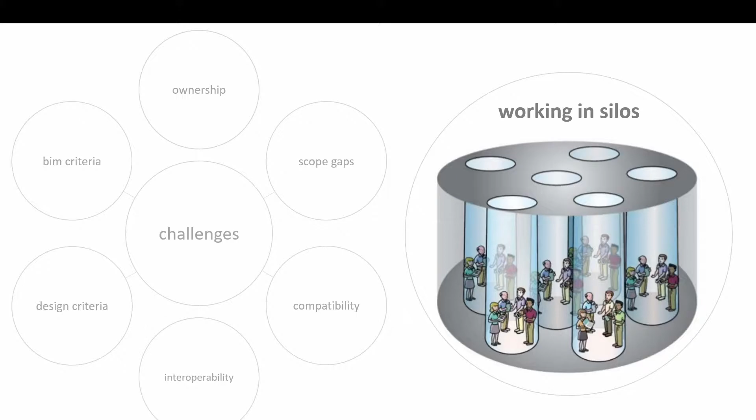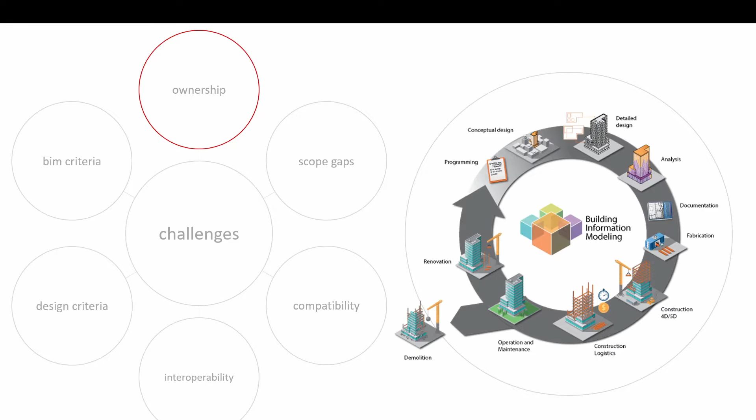When it comes to ownership, apart from the client, no single stakeholder owns everything, including BIM. For example, who owns the BIM model? At which stage does BIM start? Which BIM software to use. How often is the same BIM platform used from feasibility to construction and operation stages?

The analogy is like having a single vehicle that can be used as a sports car, a sedan, an SUV, off-roader, a shipment truck, an excavator. Oh, and by the way, there's also autonomous and electric. Maybe one day, but we're not there yet, and neither is BIM.

Lack of clarity in terms of ownership creates scope identification challenges, especially at the interfaces between different scopes owned by different stakeholders. Standard BIM may assist in resolving geometric coordination challenges. However, functional and operational coordination remains a major challenge.

As different stakeholders think differently and use different tools to produce information in different formats, which create major data compatibility challenges. The larger and more complex the project, the more difficult it becomes to formulate a mental model or the bigger picture of the entire project in the minds of project stakeholders, a point that I will elaborate on later in the presentation.

As different stakeholders operate differently, it creates many interoperability challenges, which is not just limited to software and file formats, but it also extends to how they strategize and process information, which has a direct impact on how they build and communicate their BIM models.

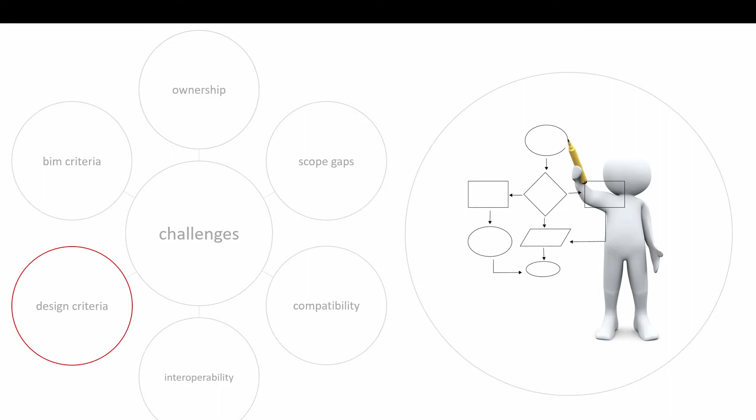The built environment industry is well established to a certain degree in terms of communicating the what and the end product, like the building geometry, material specs, and anything related to the project that is quantitatively measurable by nature. The industry, however, is far behind other industries in terms of capturing and communicating the why and the how, i.e. the design and construction and operation rationale, which may be qualitative and not as easily measured.

The compartmentalized nature of how we think and operate in the built environment is clearly reflected in how we construct and coordinate our BIM models, which often mirrors the challenges explained earlier. Standard BIM models, for example, do not capture and communicate well the design rationale and its qualitative factors and drivers. Furthermore, as BIM models grow larger in complexity and size, they become too heavy and too confusing, like a maze, for standard users to manage and navigate through.

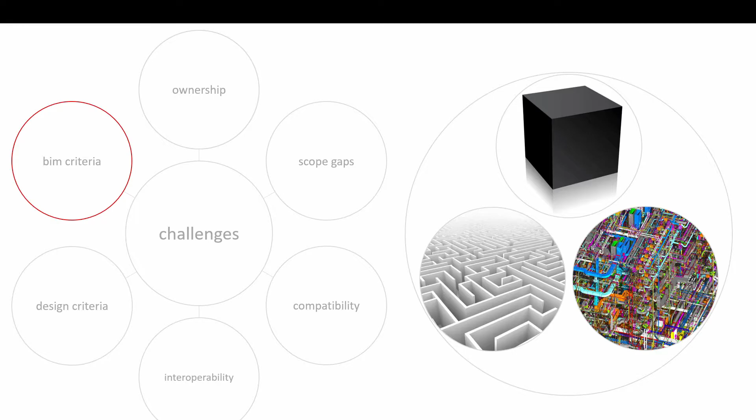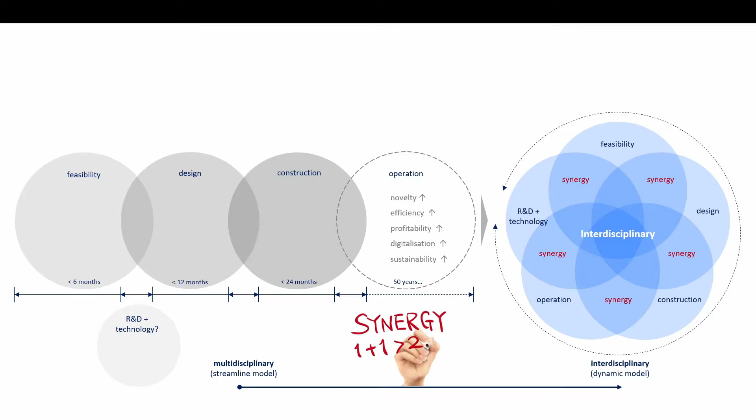A BIM model is therefore always at risk of becoming a black box that is only accessible to a few specialized operators with advanced technical skills and hardware. Therefore, a more dynamic, iterative, interdisciplinary model, as opposed to a standard multidisciplinary one, is suggested as a first step to respond to this paradigm shift, where specialists from various disciplines and backgrounds are brought together under the umbrella of one team, from early feasibility stages and maintained all the way through to construction and operation, so that the project knowledge and design rationale is neither lost nor distorted.

The first case study that I'm going to present is the Al Bahar Towers. In 2007, the Abu Dhabi Investment Council wanted their new headquarters to become a global landmark, inspired by the Abu Dhabi Vision 2030 that aspires for a state-of-the-art sustainable solution.

The site sits opposite to trees and mangrove fields, facing north. We explored traditional local and regional architecture and how nature survives harsh weather conditions to inspire our concept, including beehives, cacti, and pineapples, where the latter is the nickname given to the towers by the locals. Regional heritage offers amazing lessons in terms of form and orientation, structure, courtyards, materiality, shading, and finally geometric composition, which is deeply rooted into the culture of the region, as we are about to explore.

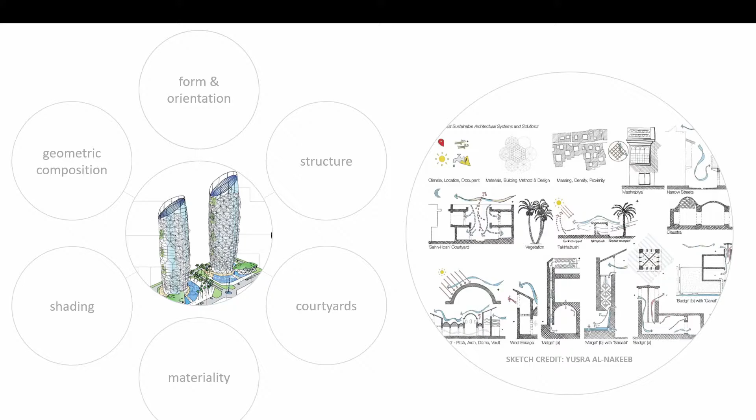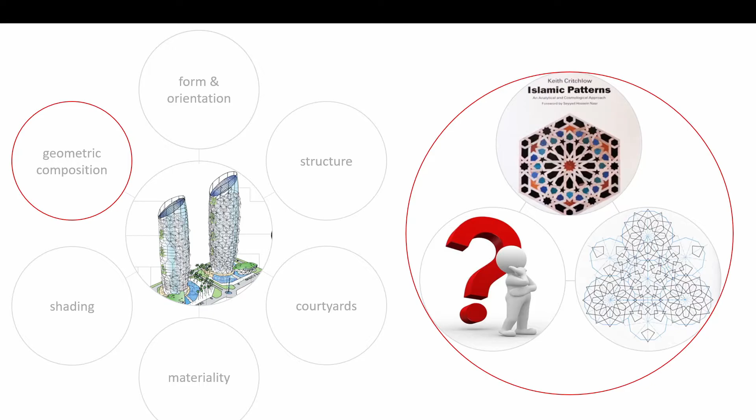Former managing director at Aedas, Peter Oborn, gave me a book which illustrates nicely how complex geometric patterns are constructed, primarily through intersecting circles and spheres. But what was the rationale that went behind them? In a nutshell, it is an implicit expression of unity with nature and the cosmos, using an abstract language that is universal, well-measured, and timeless. Mathematics and geometry fit that criteria very well.

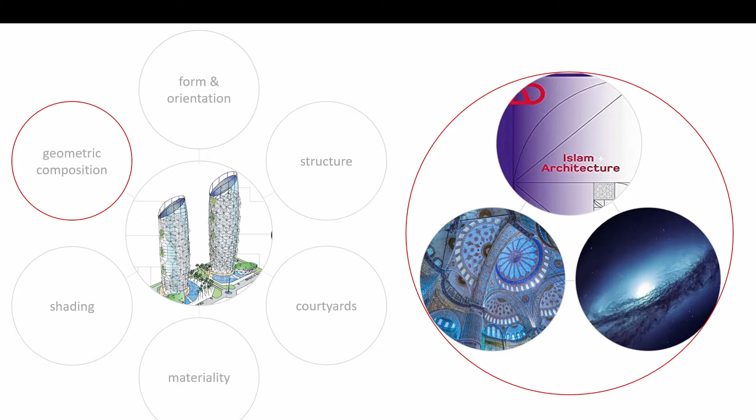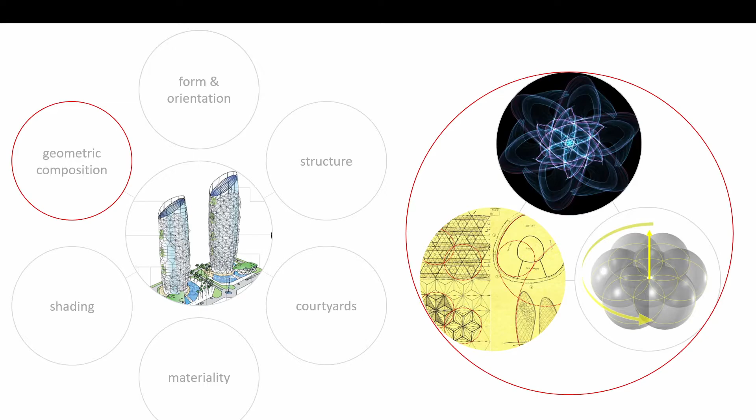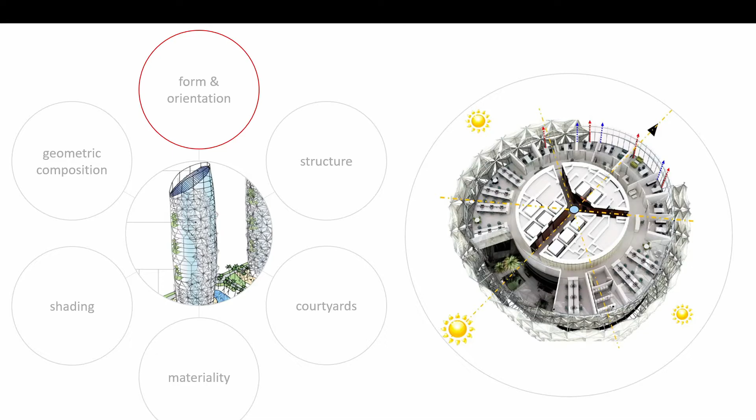Circles and spheres were considered as the finite elements through which the smallest patterns to the largest building structures were constructed. We use the same principles to design an integrated solution. A cocoon-like form maximizes volume and minimizes surface area, which reduces energy exchange between the internal cooler environment and the external hotter one. The prominent spaces were oriented north as they receive less direct sunlight while also enjoying better views.

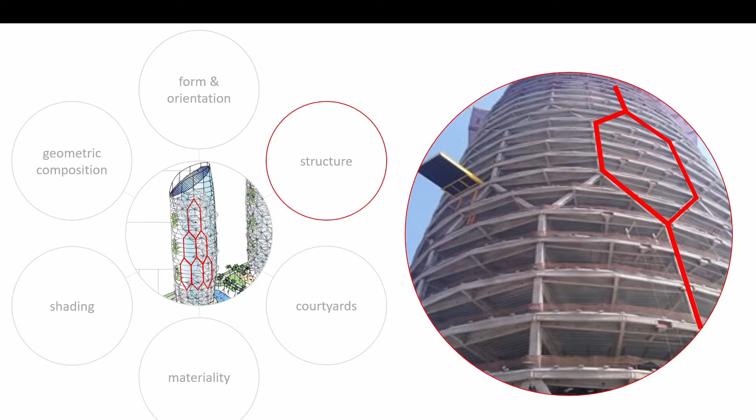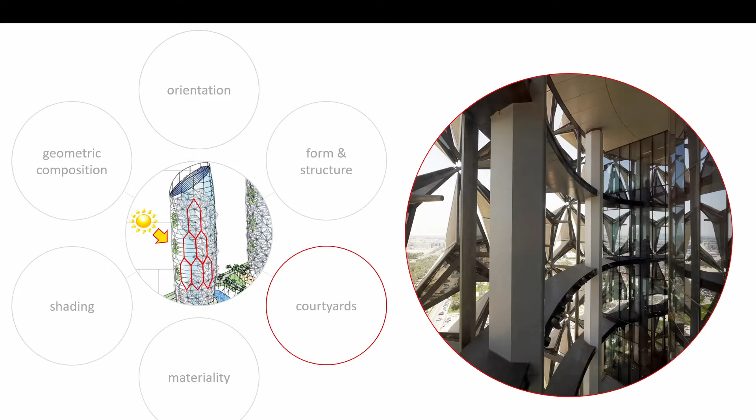Abu Dhabi is in a seismic zone, albeit not as critical as Tokyo or Los Angeles. A fully braced system would be overkill, while a common diagrid system would be inefficient. A stretched honeycomb structure offered a better balance between vertical and diagonal bracing members, the first of its kind used on tower structures. This enabled us to integrate sky gardens on the south side of the building, reducing solar gain while providing amenity spaces for occupants to enjoy fresh air.

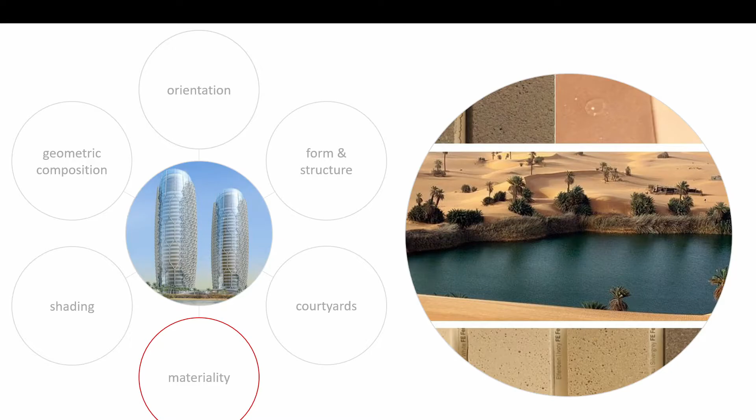The client wanted a high-tech building, but we needed to make sure that we have a solution that embraces the environment as opposed to defying it. A fine beige texture, for example, camouflages well dust and sand particles in the region over there.

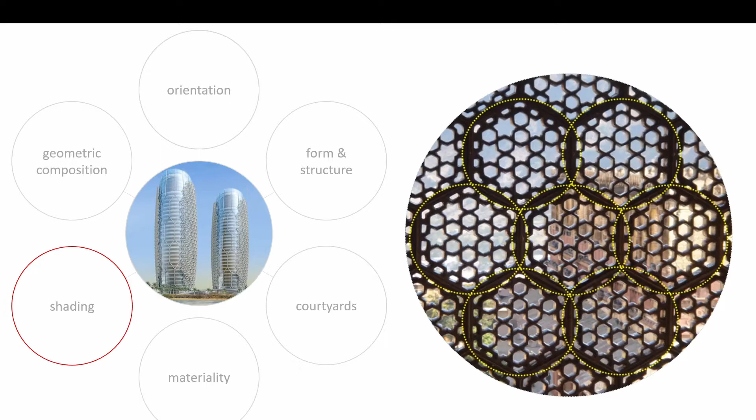Now the elephant in the room, the shading screen. It was inspired by the Mashrabiyah, a traditional lattice screen popular in the region. The dense pattern shades the building very effectively, irrespective of orientation, while still allowing visibility and ventilation. The only downside to such screens is that they are fixed, which obstructs the view and admission of lighting when shading against direct sunlight is not required.

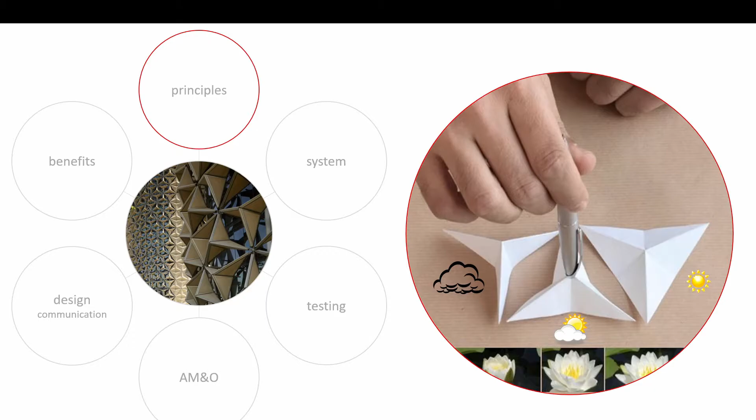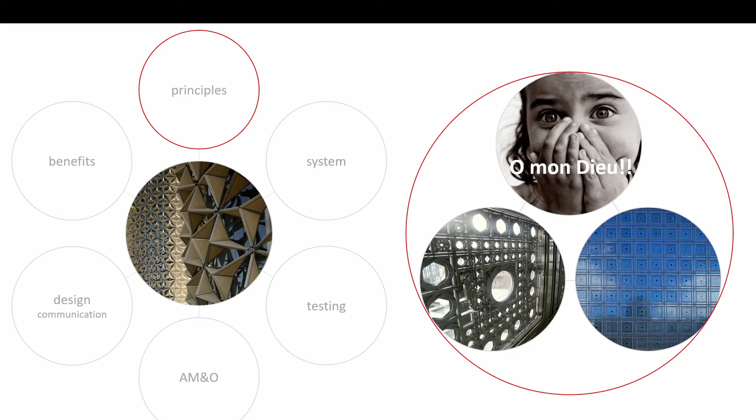We therefore infused the fourth dimension by developing an origami-like umbrella system that folds and unfolds with the movement of the sun. Yes, of course, we knew that the Institut du Monde Arabe gave up on making their dynamic facade work, but we thought that we may have an opportunity to take this beautiful concept to the next level.

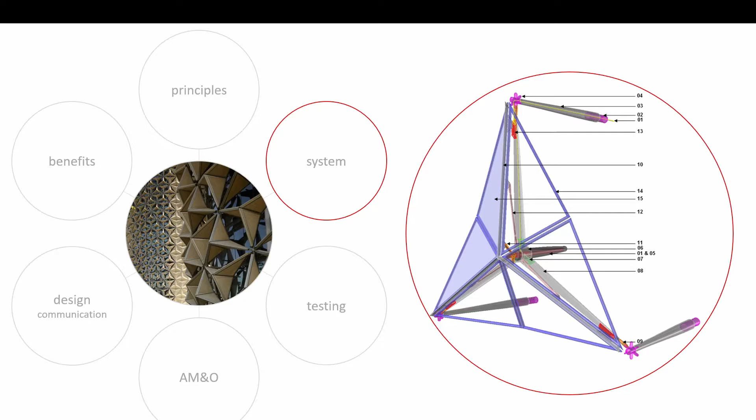The system was designed as a triangular unitized unit activated by a central screwjack actuator. The screen comprises a fiberglass mesh supported by aluminium frames and a duplex stainless steel structure. We conducted a durability test to test the mechanism over the course of 30,000 cycles, which is equivalent to 75 years in operation.

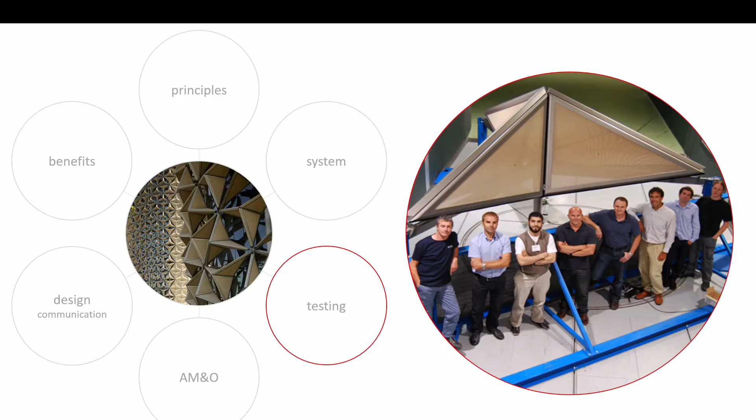Another wind tunnel test was conducted at 240 kilometers per hour wind speed to test its structural integrity. It passed both. Lightweight maintenance is done through abseiling, while heavy-duty maintenance is done through BMU units located at the top of the towers.

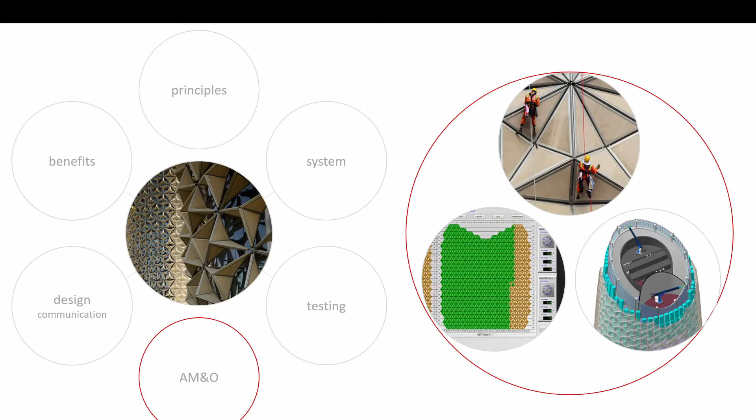The system is controlled by installed software informed by wind, water, and light sensors, especially to deal with unusual conditions. As no standards cover such design, a 400-page Lego-like manual was developed to visually communicate the algorithmic principles of the building, enabling recreation of the design using any software. More than 13 software packages were used in total.

I shall elaborate on the design communication later in the presentation, where BIM was critical to the process.

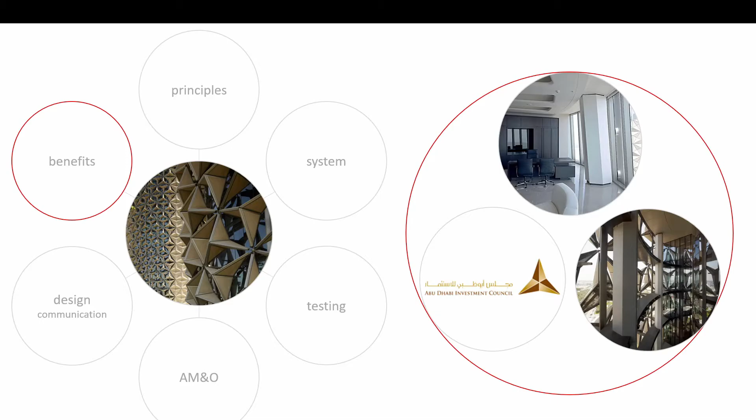The Mashrabiyah helps in cooling the building and in optimizing admission of natural light, while still providing views to the outside. It offers a unique experience and a great source of entertainment for occupants and visitors alike.

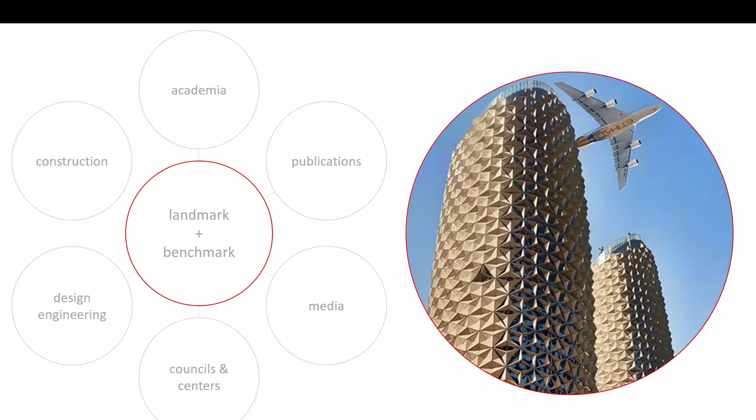The building is continuously used as a case study and referenced by various stakeholders across the built environment. What you're about to see was completely unplanned for, and it even took me by surprise when it happened.

The government is using the building to celebrate their National Day every year.

The Al Bahar Towers won the Best Innovation Award for 2012, offered by the Council on Tall Buildings and Urban Habitat in Chicago, and has recently been listed among the 50 most influential towers over the past 50 years by the same body. It has become both a landmark and a benchmark for context-considerate, interdisciplinary design for generations to come.

So that was a brief introduction to the project, but as promised earlier, it is important to elaborate on the design communication aspect, where BIM played a critical role.

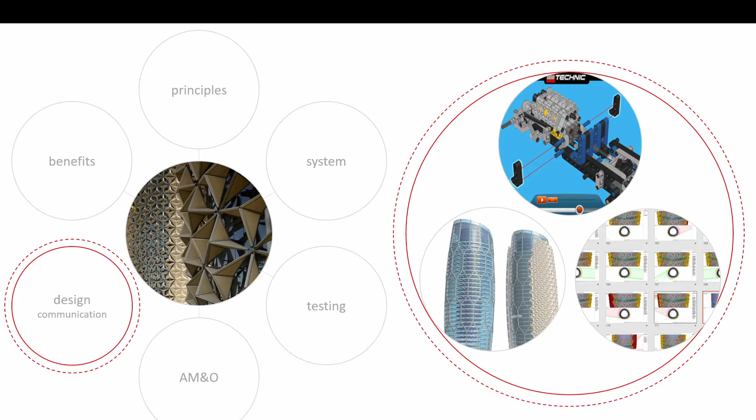As the lead designer on the project, it became obvious early on that it would be nearly impossible to limit the process to a single BIM software, for the following reasons.

The design complexity of the project is not limited to the building geometry, but it also extends to cover the building performance, especially the dynamic mechanism and adaptive behavior of the Mashrabiyah screen.

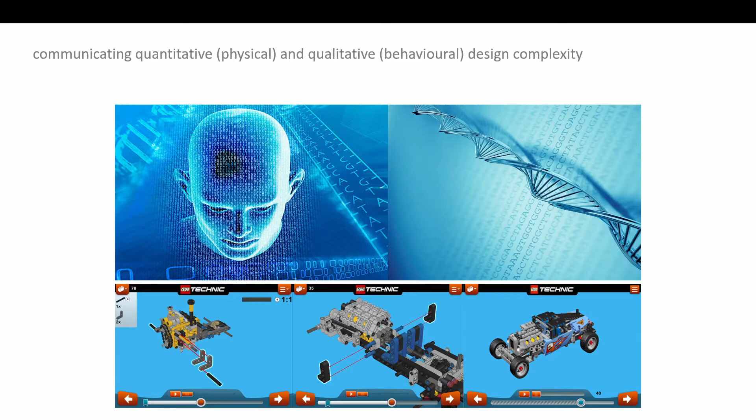To overcome the challenge of design communication, we drew inspiration from human DNA and Lego manuals, where the former is a set of instructions that describe both the quantitative and qualitative nature of the human body, how it grows and how it behaves, while the latter, the Lego manual, offers a great example of how to communicate design using a human cognitive visual language that anyone from any background can understand and follow.

A special mechanism to process the information and communicate it in a diagrammatic visual fashion was developed, formulating a 400-page set of visual instructions to construct and operate the building and its dynamic shading screen.

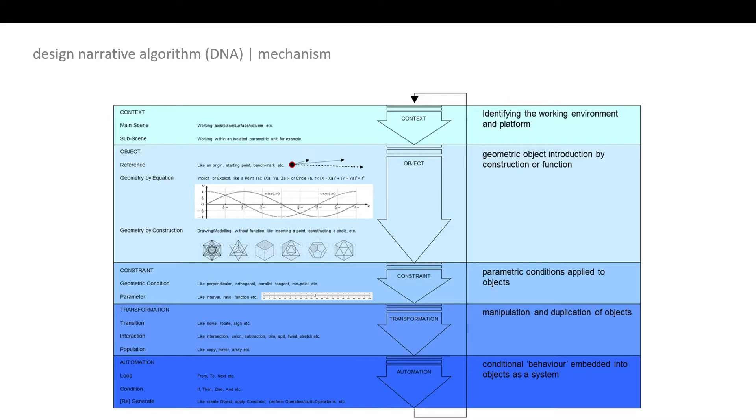I later developed the mechanism personally as part of my PhD research at the University of Bath, and I called it the design narrative algorithm, which communicates the design algorithm of any project in a visual, diagrammatic fashion.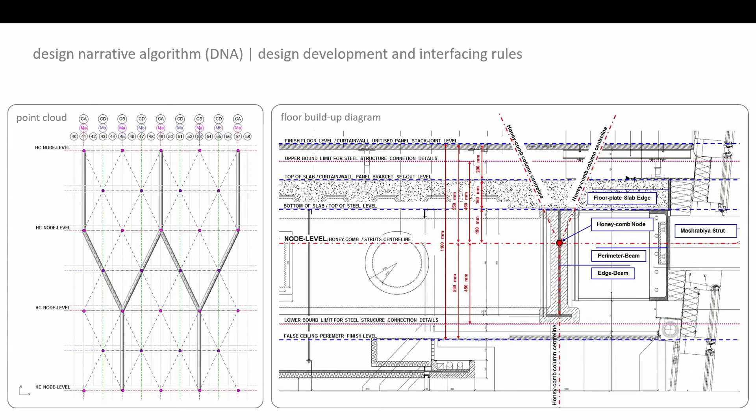A set of design development and interfacing rules were developed that also describe what the point cloud and the wireframes represent: finishes, structure, envelope, building services, etc. This lays the ground rules for scope ownership and scope interfacing as the design develops and evolves from stage to stage.

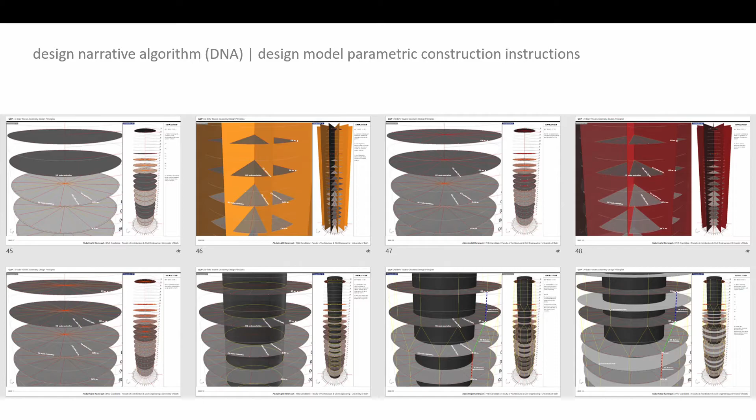These slides, for example, are part of the instructions that explain how the physical geometry of the design is constructed.

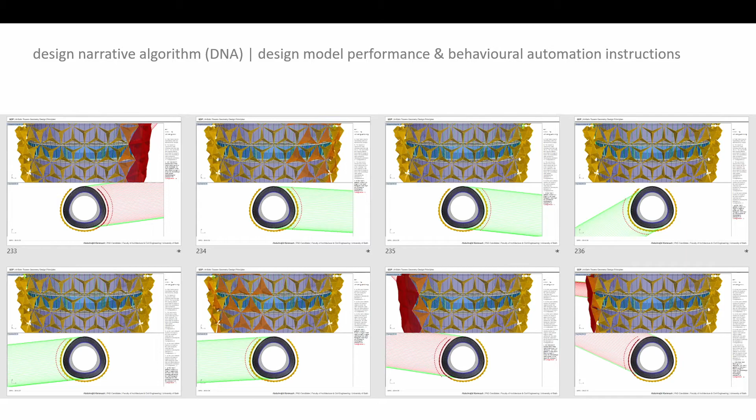These slides, on the other hand, are part of the instructions that explain the performance and behavior of the dynamic Mashrabiya screen following the movement of the sun.

The DNA enables us to use a scripting and software-free universal visual language that anybody can understand and use to generate their own scope using any digital tool or software of their choice.

The DNA was issued to project stakeholders distributed in various geographic locations, from the US to Japan. Project stakeholders would each build their own model using any software of choice.

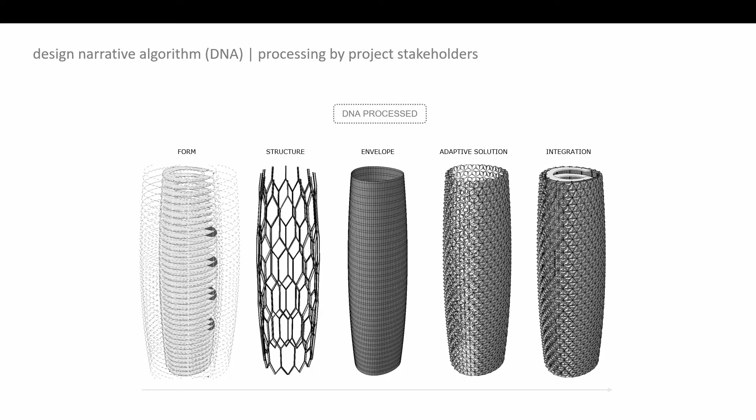The design team, for example, used Rhino, AutoCAD, Revit, Digital Project, 3ds Max, to name a few. The steel structure contractor, for instance, used Tekla, while the facade contractor used Inventor. In total, more than 13 different packages that I am aware of were used to develop the various scopes and elements of the building.

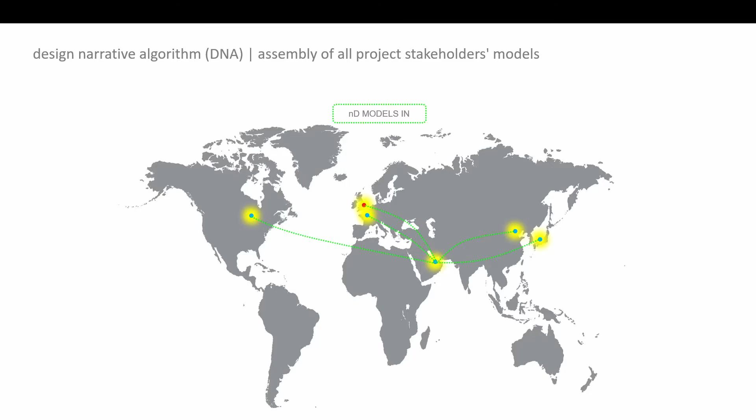All models are then assembled in Digital Project, which is more like an architectural version of CATIA, on-site in Abu Dhabi via Gehry Technologies, who were our BIM consultants at the time. I think they're currently called Trimble.

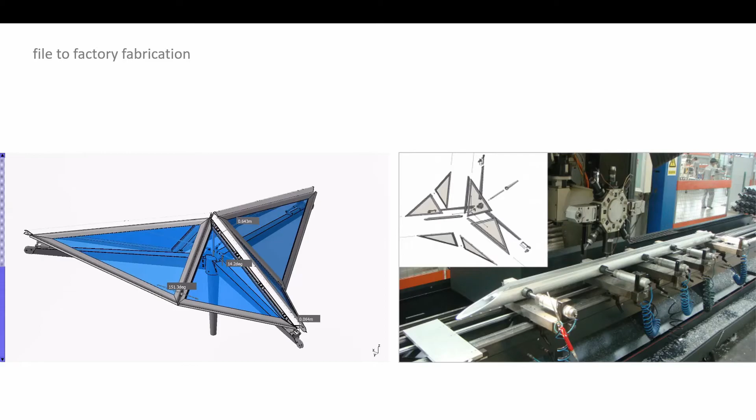Highly detailed simulations and fabrication models were later produced to fabricate the first Mashrabiya prototypes for physical testing.

The following images describe the construction process outline. Here, for example, the architects produced the wireframe models, and then we passed it on to the engineers, and the specialist contractors, who in return produced their solid models.

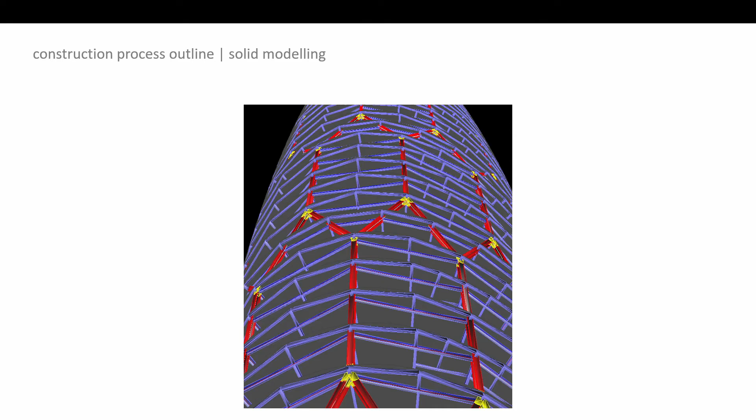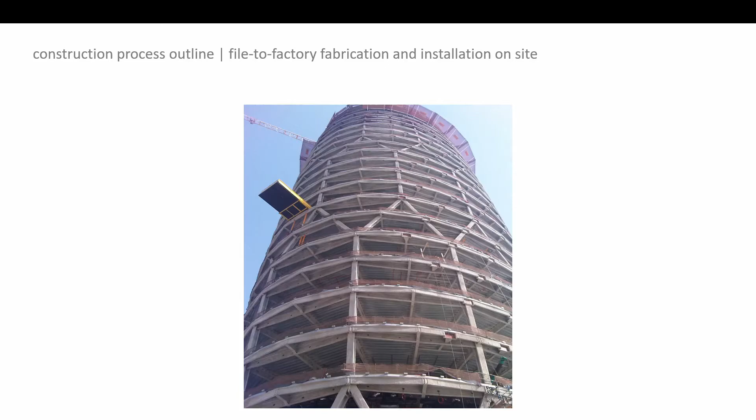Components are fabricated using CNC machines, and laser-guided topographic machines were used for installation on site. This image shows the building while the structure was being constructed, and this is the building a year later after it was cladded.

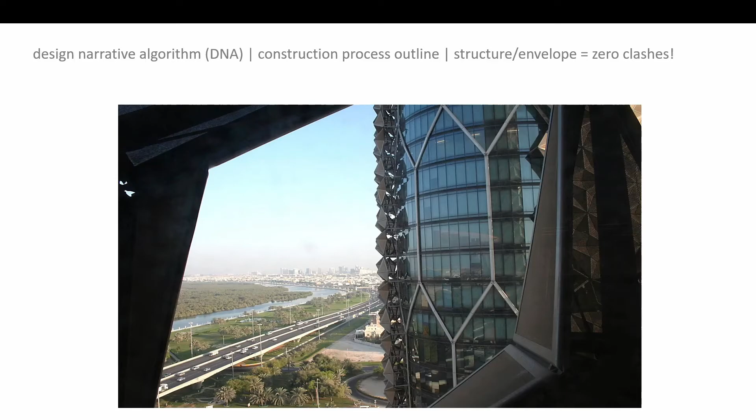Following the DNA manual, zero clashes were reported between the main supporting structure and the building envelope of the towers, which are the highest in terms of complexity from a geometric and functional standpoint.

Some internal shots showing the good level of shade that the Mashrabiyah provides, while still providing good levels of natural diffused light and good views to the outside.

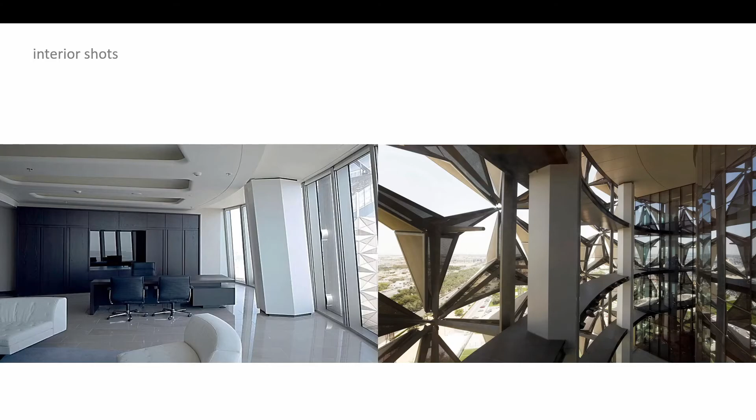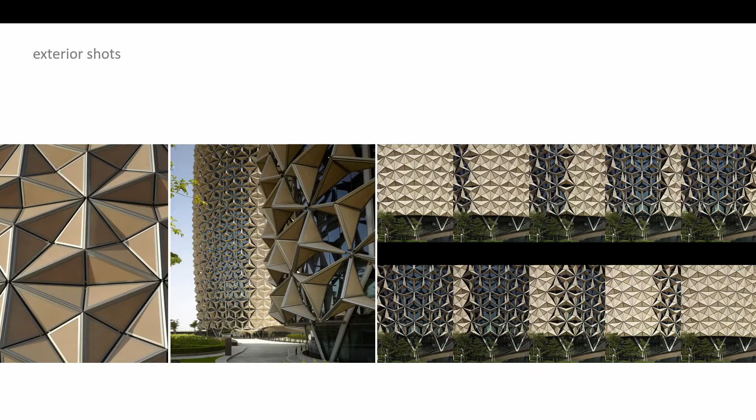Some external shots showing how the Mashrabiyah shrouds the building, and a series of images on the right show the various folding positions and configurations of the dynamic unit throughout the day as they follow the movement of the sun.

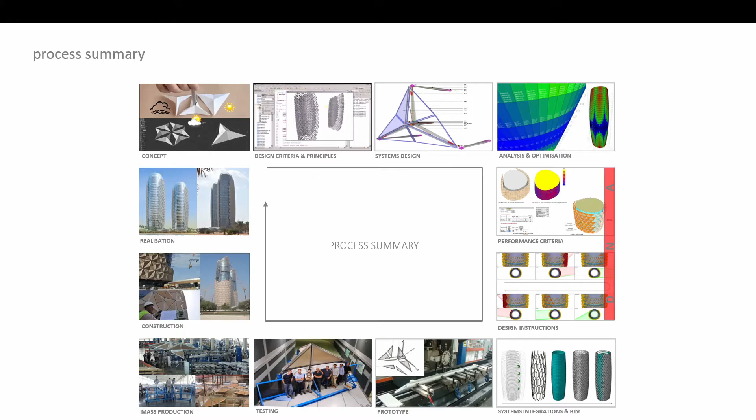The entire design to construction process is summarized in this diagram, where it all started with the origami paper model. Then the design underwent a series of digital exploration, simulations, and analysis, from which the DNA manual was produced, which freed the process from being locked down to a single BIM software, to prototyping and mass fabrication, to mass installation and operation.

Taking the concept of visual design communication to the next level to augment BIM, we have applied similar theories on a large confidential master plan, where this time we have included other design elements or factors that drive the design, including capital and operational costs.

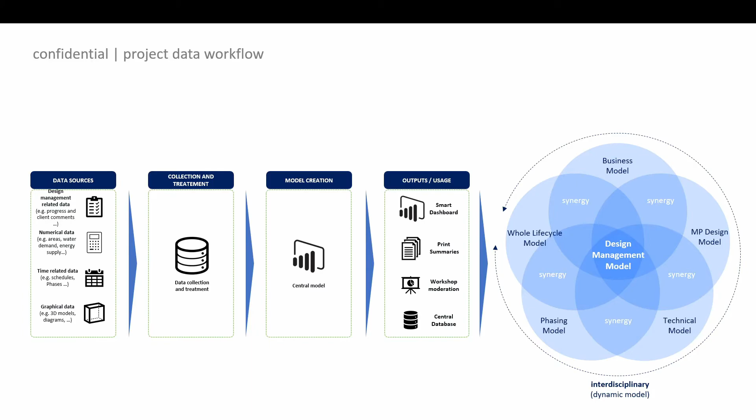After having established the design criteria of the project, we developed a project data workflow to enable us to process any data in any format coming from any stakeholder and convert it into a format which we can integrate into the master interdisciplinary design model.

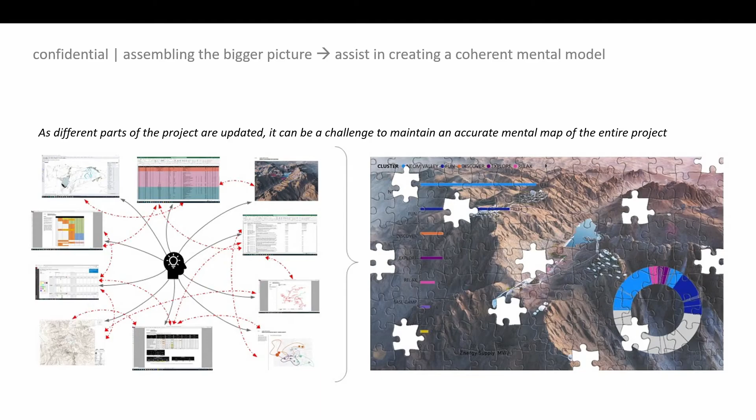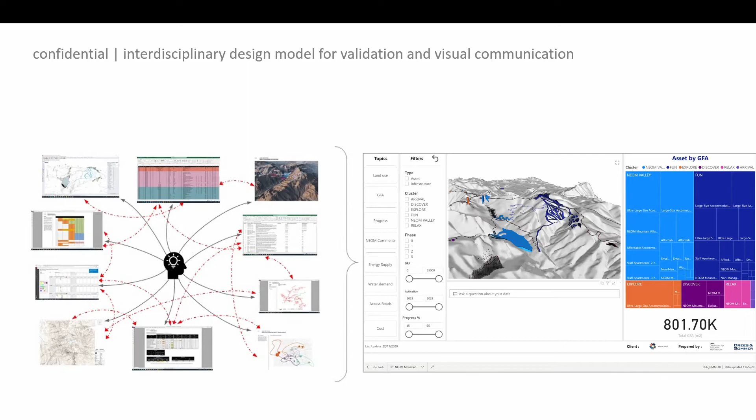The analogy is like converting the input of all stakeholders into jigsaw pieces that can be assembled to communicate the bigger picture to all stakeholders, and updated as the project develops, especially for high-level stakeholders like the client. A special data visual communication platform was developed to maintain an accurate mental model of the bigger picture of the entire project.

The interdisciplinary design model, or IDM, comprises a high-level Grasshopper representation of the master plan design, various technical and financial models in Excel, and Power BI to link all the models together parametrically in a user interface.

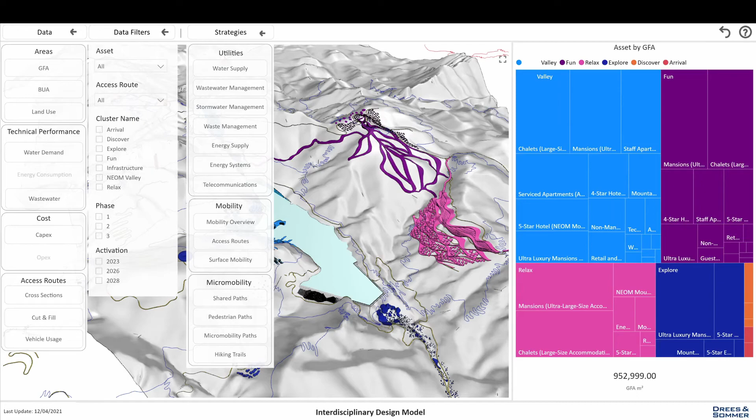The drop-down menu offers access to all kinds of project information like area, capital costs, operational costs, water and energy demand and consumption, waste management, mobility, and carbon footprint on emissions.

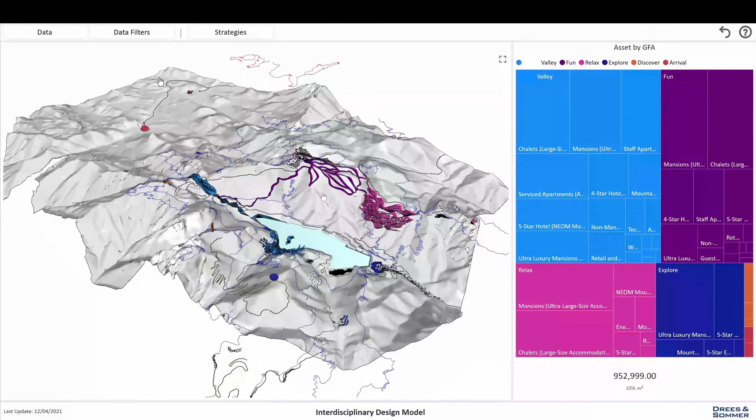Here is a recorded video of the interactive nature of the user interface, where the user can zoom in and zoom out, and spin the model around for more clarity while viewing the related information.

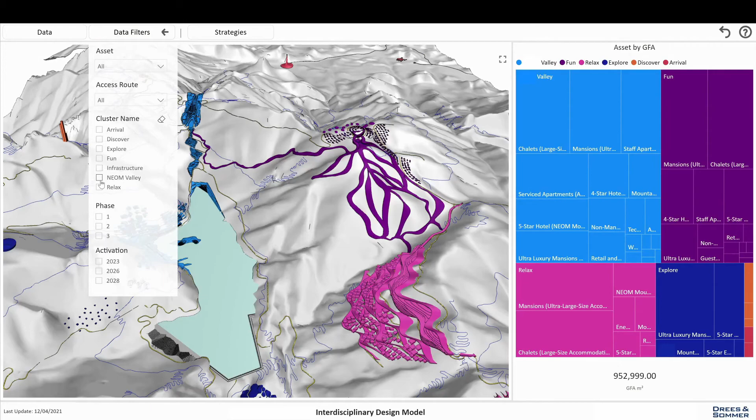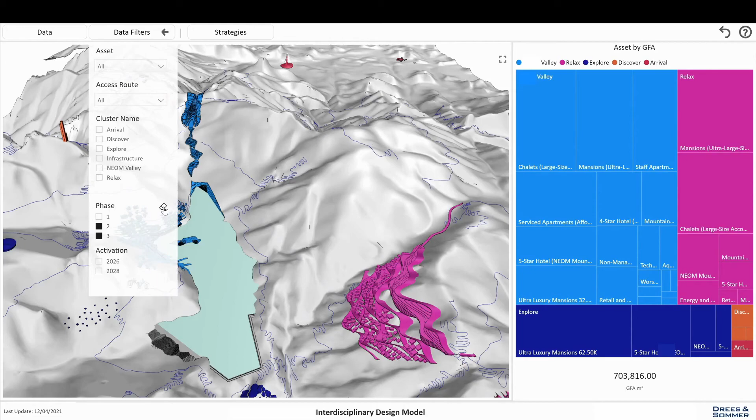For example, during one of the design reviews, some of the engineers were looking at the road, looking at the figures, and then looking at the actual geometry and topography of the road. They were able to discover some mismatches between the two.

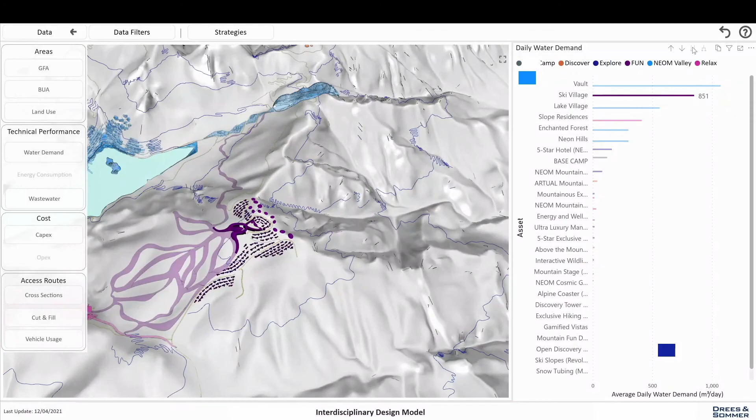This is the power of being able to link digital and text-based information with the visual side of the design, because then people will be able to relate in terms of what's going on and whether or not the figures make sense or match the image.

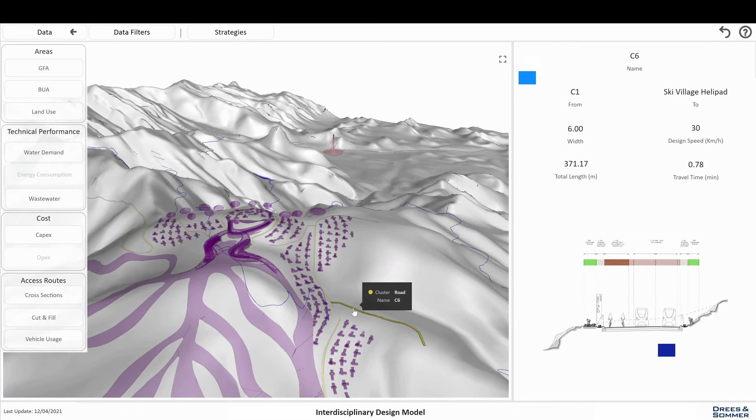Here, for example, it's clicking on the roads and it's showing the section and the road design and all information related to the roads. And we can do the same with building structures and other assets.

To summarize the presentation, we need to make sure that the design criteria, including the design development and interfacing rules, are well defined, because this will pave the way to make sure that the BIM criteria reflects well the design criteria and its established rules.

We should try to avoid as much as possible locking down the process to a single BIM software. This is especially the case when we work on large, complex, and innovative projects. Always be flexible to use the right tool for the right stakeholder and discipline at the right project stage.

Maximize the use of visual techniques to capture and communicate design and its rationale using a cognitive-friendly language that anyone can understand. Thank you very much for your attention.